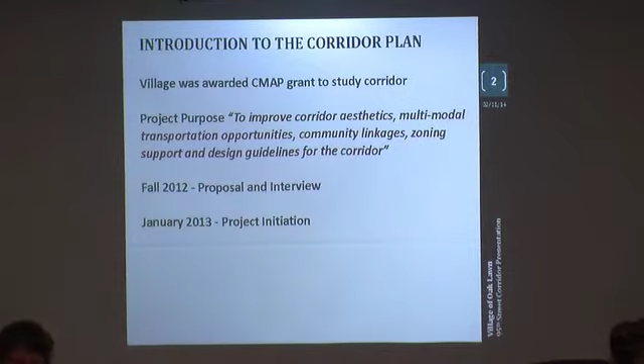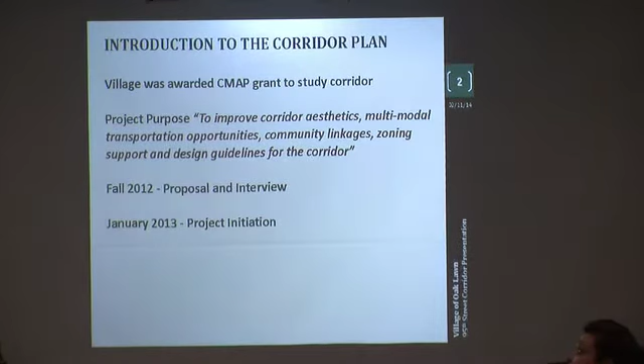A little bit of background as to how the village came to study the corridor. A couple years ago, the village was awarded a grant through the Chicago Metropolitan Agency for Planning, also known as CMAP, to study the corridor. The purpose had multiple aspects, but it was basically to improve the way the corridor looks, to improve multimodal transportation opportunities—access to PACE, Metra, walking on foot, good bike access—improve linkages between community destinations, and zoning support and design guidelines for the entire corridor.

The zoning support and design guidelines address the properties that abut the corridor. So we're not just looking at what happens within the right-of-way of the road, but also what happens on the properties that abut the road, so overall we have an overall enhancement of the corridor.

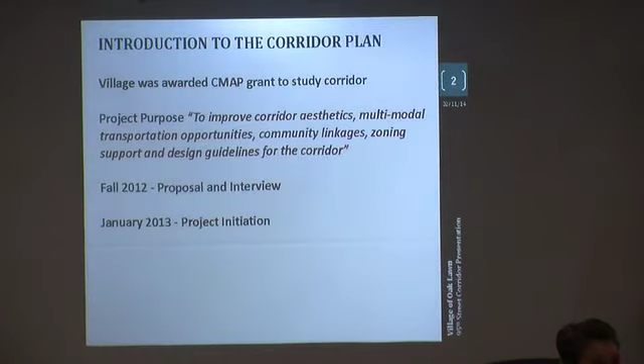Back in fall of 2012, Teska put in a proposal. We competed against some other Chicagoland firms. We were selected for an interview, and then by holiday time, we were told that we were selected. We were very pleased to be working with the village and with CMAP, and we began in January of 2013.

I am part of a larger team. Tonight, Teska is the project lead. We are the community planners, urban designers, and landscape architects. We have a team member, Business Districts Incorporated, who does the development economic piece and market analysis. We have an engineering firm, Gewalt Hamilton, responsible for transportation planning and engineering. So between the three firms, we were able to look at the roadway from a transportation standpoint, a market standpoint, and also a design standpoint and community identity.

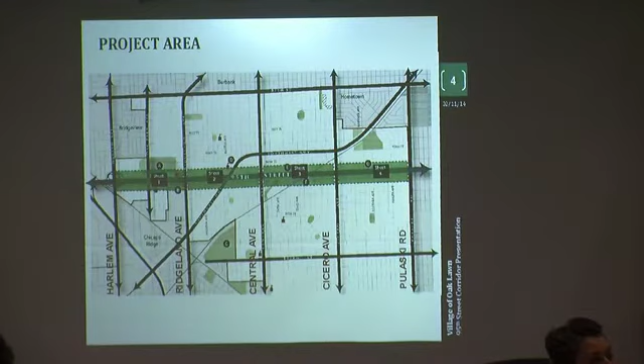You probably noticed in the report the graphics for the roadway are broken up into 1-mile segments. It's a pretty long corridor, 4 miles between Harlem Avenue to the west and Pulaski Road to the east. Each of the graphics describing the recommended improvements for the corridor are organized in these 1-mile segments: Harlem Avenue to Ridgeland, Ridgeland to Central, Central to Cicero, and Cicero to Pulaski.

A little bit about our schedule. We began in January of 2013. We're aiming to complete by the end of this month. We began our public outreach in January of 2013, and that process has been ongoing. We've got a final public meeting planned for the end of this month. The outreach included a community survey, interviews, focus groups, and workshops. We wanted to hear from the public in a range of different venues, both digital and in person.

We did some data analysis at the beginning of 2013. We were able to acquire GIS information from the village. We put together our maps and data to be the basis upon which we prepared our design documents. Then the visioning began in May of 2013, and we started to prepare the plan with touch points along the way with the village to develop that plan from June of 2013 until today, February of 2014.

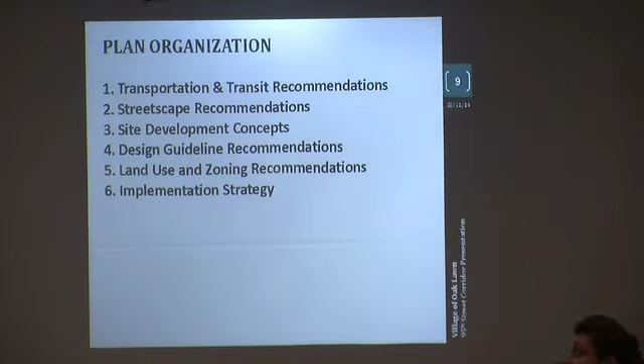The following piece is the implementation strategy, which outlines a roadmap for the village to undertake to get some of these things done.

To begin with transportation, as we all know, it's a really well-traveled road. It's a wide road, it's a bit of a barrier for pedestrians to cross, and on top of that there are some narrow sidewalks. So we know we have a lot to compete with, and we also know we have to continue to move all that traffic on the road.

Some of the goals that the transportation section outlines is to develop a median plan. As you've probably noticed, there's a lot of raised concrete and painted median along the roadway. IDOT is interested in a median because it helps separate traffic. In some spots, northbound and southbound, or eastbound and westbound traffic almost touch one another, but creating a median separates them and creates a safer atmosphere for the cars. From a village identity standpoint, it's a tremendous opportunity to incorporate things like signage, landscaping, and public art into the median and make that a key identity feature for the community.

Updating the crossings so that there are better signals, making them safer to cross for pedestrians.

Pace Bus is involved in a transportation project at the same time that we are. They're evaluating the 95th Street corridor beyond Oak Lawn, which includes Oak Lawn and continues to the west. Part of this program is a proposed arterial rapid transit system, basically updated buses, updated shelters, and more high-technology elements in the plan. So we want to make sure we're priming the corridor for that sort of thing.

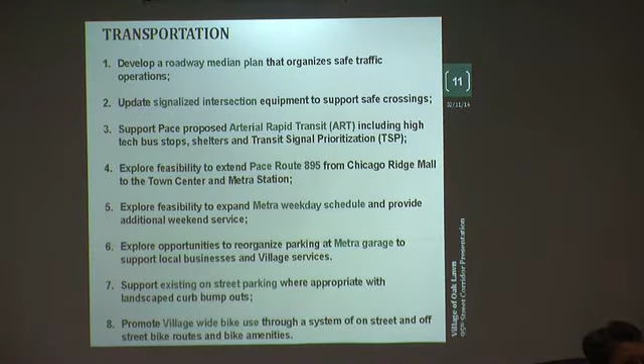Pace Route 895 currently terminates at Chicago Ridge Mall and then goes up to I-294, so we're working with Pace to explore whether it's feasible to continue that route all the way to the town center, to support the town center as a hub of activity.

We heard a lot of response from the public, a desire to expand the Metra weekday service, so that's included in the plan to have additional Metra service. We know it's going to depend on Metra's programming and budgeting to allow that sort of thing, but we've documented that this is something the public really wants to endorse in the plan.

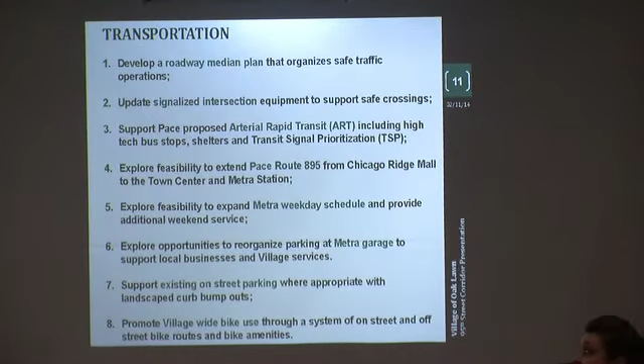The Metra Garage had some vacancies, so the village has been in discussions with Metra to look at whether some spaces could be freed up for parking for the patrons of downtown. There are some approvals that would need to happen with the FTA and with Metra, but there may be opportunities, we believe, to increase parking for business patrons within the Metra Garage.

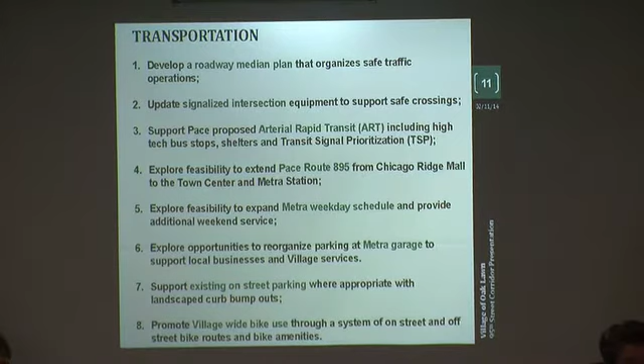On-street parking, for those on the steering committee here tonight, was a very hot topic throughout the course of the project. On-street parking serves the businesses. I understand that in years past, some on-street parking had been removed in favor of a widened roadway, but we, as a steering committee, put forth a plan that supports on-street parking where it exists today. It's defined by things like curb bump-outs or knuckles that you've probably seen along 95th Street in Beverly to our east. There is only one spot where the on-street parking would not remain, and that is in front of the AT&T switching station over at Brandt, which helps us with the proposed signalized intersection at Brandt Street. But otherwise, where on-street parking exists today, the steering committee has proposed that it shall remain.

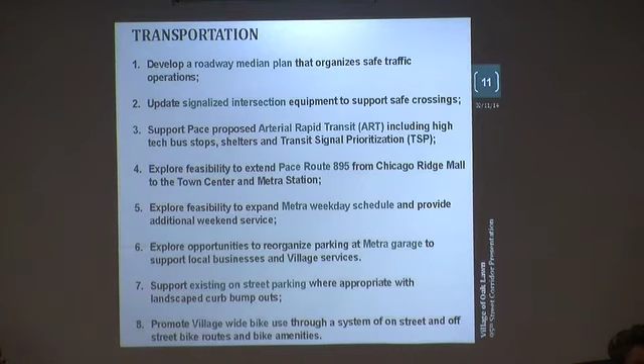And then bike use. We all understand that the village has a draft bike plan and that biking is important to the village. We took that bike plan and reviewed it against some of the other biking initiatives happening on the east side towards Chicago and the west side towards Bridgeview, and we filled in the gaps with proposed bike routes as part of this corridor study.

And then we found that as we went through with our engineers, there's a lot of excess pavement, which I'm sure everyone's already noticed, where the roadway has spots that feel like the travel lanes grow to a travel lane and a half almost. So we've proposed reconfiguring the section so we can get a wider sidewalk, and we've identified places where we can do that.

There is only one proposed roadway extension shown on the plan, and that's near Centennial Park to serve the neighborhood.

I want to mention that the raised medians serve the function of separating eastbound and westbound traffic, but they also control traffic that wants to move either eastbound or westbound on 95th Street. What we heard from the community was a desire not to make a left turn onto 95th, since it's too tough when we're not at a signalized intersection. So these medians are located strategically to encourage right in, right out only at select intersections, restricting the left turn because the median would be in the middle of 95th Street.

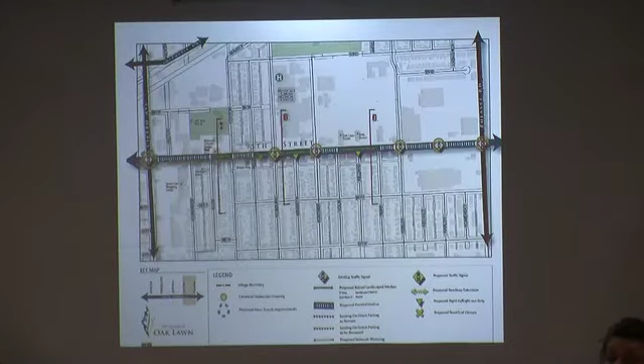I'm going to go through these to get to the sections. You can see these red section lines identify the several sections shown throughout the report. I just wanted to hit on some of the major topics, the major road typologies proposed in this report.

Section A, this is the landscaped median. This is when you're driving eastbound on 95th and you've just come off the highway, for instance, or the tollway. The raised landscape median, or raised concrete median, would be replaced with landscaping. This is the kind of improvement that could happen basically tomorrow if approvals are in - it doesn't require any changes to the roadway, but additional landscaping on the sides to present a nice gateway treatment into the village, and also landscaping in the median.

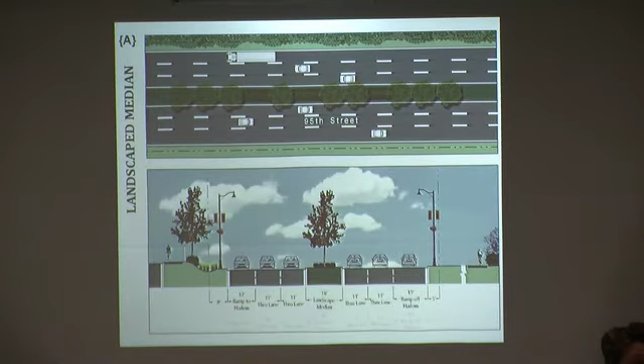And by the way, as a steering committee we talked about this becoming an avenue of the arts - as you came in, this landscape median is so wide, about 16 feet here. With the IDOT required setbacks and the right size sculpture, we believe this could be a tremendous opportunity for a pattern of sculptures along the way, so as you drive in - no other community has something like that. But we think there might be an opportunity for that here.

Another typology is where we have on-street parking. You can see the plan view drawing at the top - these are the on-street parking spaces. Today the curb just continues all the way through and then turns into the side street. What we're proposing is a bump out that defines that parking so people know this is a space reserved for parking. It also provides an opportunity for landscaping and a little bit of green on the corridor.

This is also an example where, by modifying the width of the median, we're able to get a couple more feet for the walkway. Some of these walkways get as narrow as 6 feet, but in this location we believe we can get up to 9.

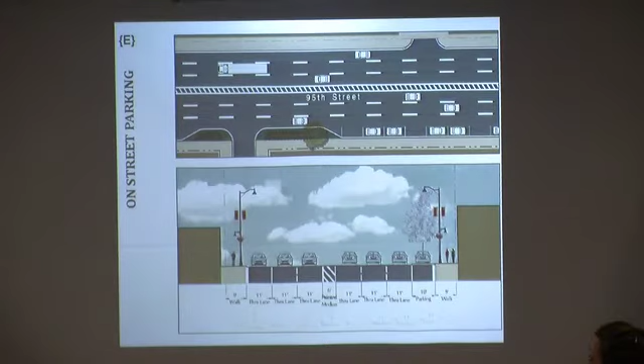Another section, landscape median with sidewalks. This is very similar to what we just discussed, but this section is taken near the Metra station. Here, the median that's out there painted today is fairly wide, about 16 feet. So we're able to shrink the median down to 12 feet, still get a nice, generously landscaped median, but give some of that extra space over to the walkway on either side.

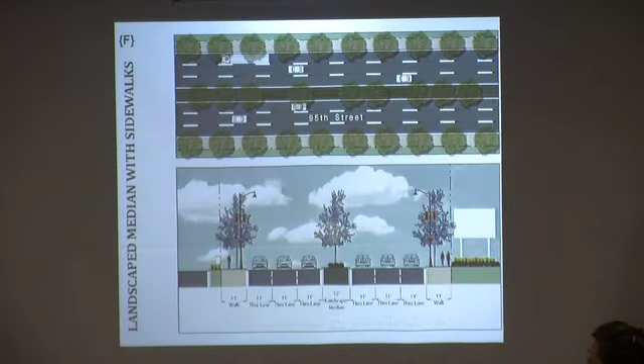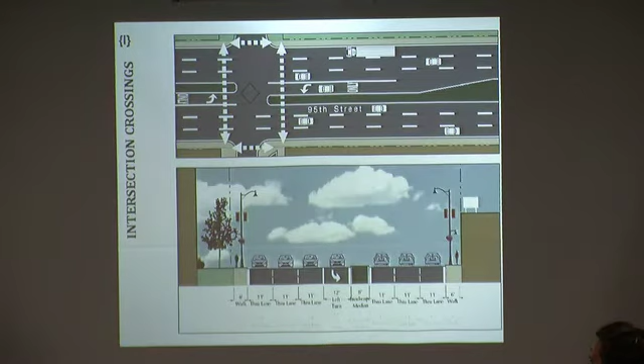And then an example of an intersection crossing where there's a signalized intersection—this diamond shape represents a signal. This also comes directly from IDOT, but IDOT would like to see wherever there's a left turn lane that there's a very narrow median to separate the traffic. The nice thing about medians like this is that at an intersection, the crosswalk can continue all the way, giving a person a place to land on a median, paved at this point, and then continue along, reinforcing a pedestrian safe crossing from one side to the other.

From a bike plan perspective, we've identified on-street versus off-street facilities. There are already some great things happening in the village with on-street biking along 93rd Street. CDOT has some proposed lanes as part of their 2020 cycling plan to the east, and we've identified some other opportunities to promote biking in the village.

These are examples of on-street biking on the bottom left—that would be called a sharrow, which is a painted bike lane on the street. Just to point out, according to Illinois state law, bikes are permitted on all roads, and this just alerts motorists that this is a designated bike route so they can watch out for bikers. On the bottom right, that's similar to what we already have on 93rd Street.

And then the off-street trail up on top. This occurs really at the Stony Island or Stony Creek area, and also on Ridgeland Avenue. As part of a Ridgeland Avenue corridor plan our firm is involved with, a 10-foot wide multi-use trail is proposed along the length of Ridgeland.

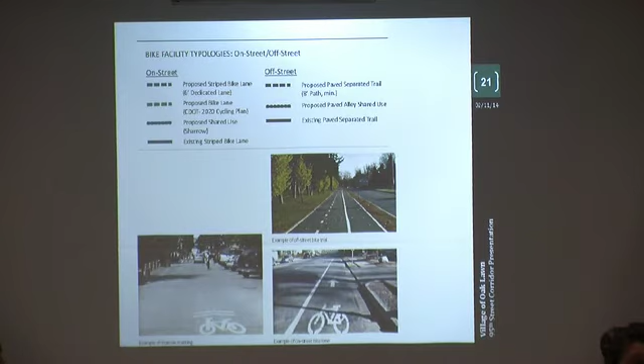So we have this major east-west route along 99th and along 91st, with some along 93rd. And then at key places where the roadways intersect 95th with a signalized intersection, we've got a north-south route identified. That will get folks into the town center and around it without having to travel on 95th Street itself.

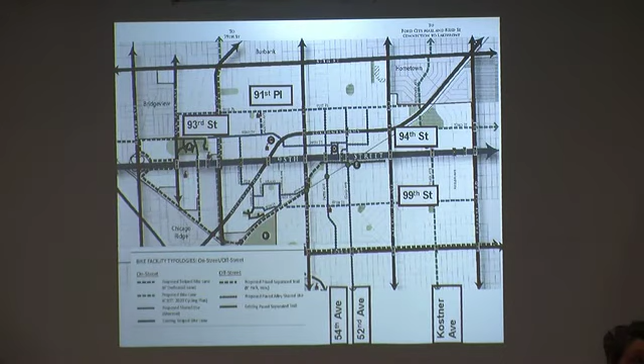The streetscape is really a follow-up to what was identified in the transportation section, but again, it's to promote downtown and to promote the corridor as a really attractive, welcoming corridor for the village.

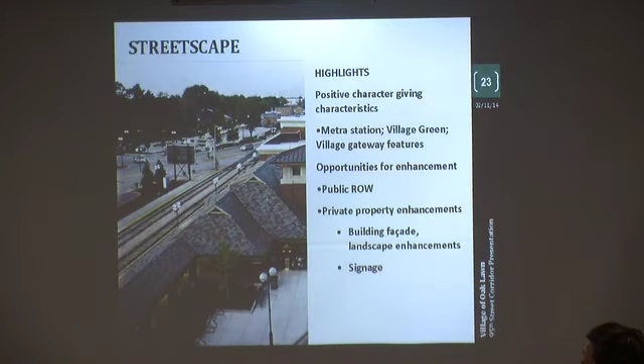Reinforcing the gateway treatments, we talked about the medians already. Something the public and our steering committee got very excited about was the treatment of the Museum Drive extension. The village is already working with their consulting engineers on improving the area behind the museum, the alleyway, and reconfiguring the parking. We believe it was also an opportunity to promote a really cool, dynamic, compelling public place—somewhere people could sit in an outdoor cafe, go to a nice plaza, or enjoy small musical performances. We thought that in addition to just parking and traffic, there might be opportunities to make this a very attractive, compelling place. I'll show you a little bit more about the Museum Drive in a minute.

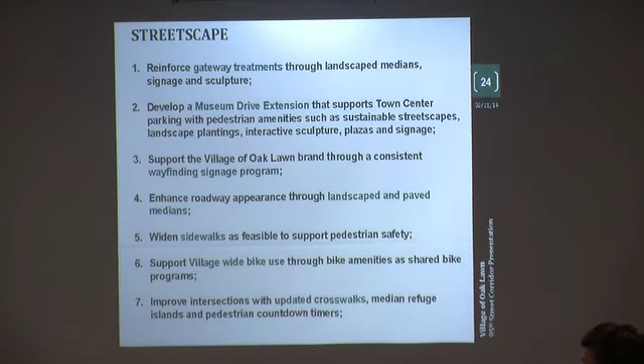Wayfinding signage is something that's relatively low cost but high reward that the village can take on—we've got some examples of that. And then we talked about the medians, widening the sidewalks, the bikes, and the same thing with the updated crosswalks.

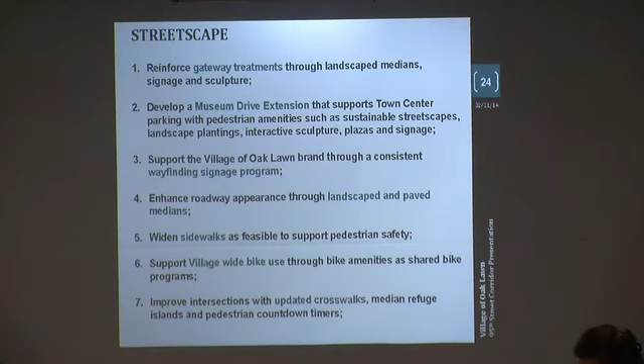Other amenities like lighting and planter pots go hand in hand with streetscape improvements. By the way, of the many responses we got from the community survey, the other thing we heard the most was a desire to relocate some of the large planter pots away from the intersections on 95th Street. So by virtue of this process, that's one of those things that doesn't cost a lot of money to modify, and the village can start to make progress with the corridor plan.

Updating the paving to meet current ADA standards, and adopting a sustainable and coordinated street furnishings program. The village has already demonstrated a huge commitment to sustainability through the green team and some of the LED lighting projects happening outside the corridor. We thought this is an opportunity to adopt some of those treatments into the corridor plan.

The village already has great signage on the bridge.